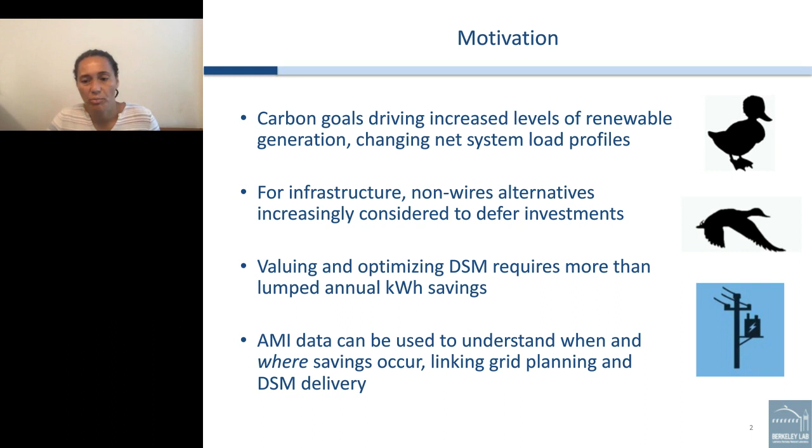In this work, I'm going to share how we've used AMI data to understand when and where on the grid savings occur, and how that helps us to link grid planning and EE program delivery.

I'm going to go through three questions. First, what are efficiency savings at different locations in the distribution grid, and how do those savings impact energy used at those locations? Second, what's the hourly savings shape at different points in the grid, and how do those shapes vary with season? And finally, what can we say about the impact of the EE programs on peak demand?

I'm going to get us grounded in some definitions and methodology before digging into results. And first, I want to talk about data aggregation and levels of analysis. Our analysis covered a scope of 51 feeders and 12 substations in the SMUD territory.

The first thing we did was we had labeled data on which meters corresponded to accounts that had participated in programs in a given year versus those that had not. So for each feeder, we aggregated the loads from the participants and from the non-participants into a single time series that's shown in green, and we paired that with outside air temperature.

To remove confounding factors, we kicked out any accounts that were known to have customer moves during the analysis period, or customer-sited PV or electric vehicles.

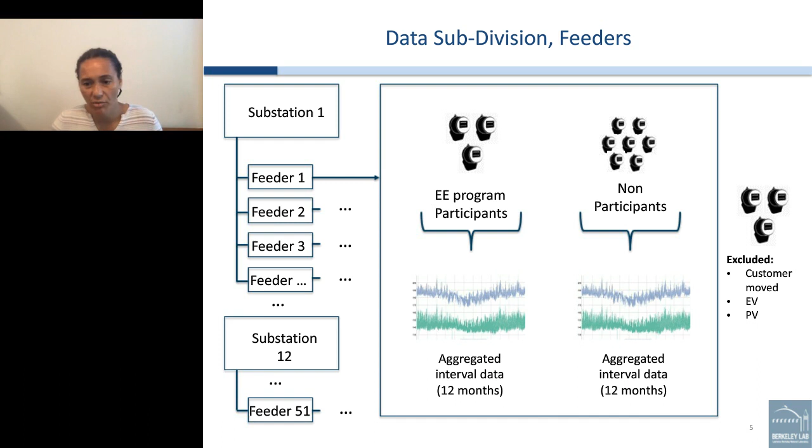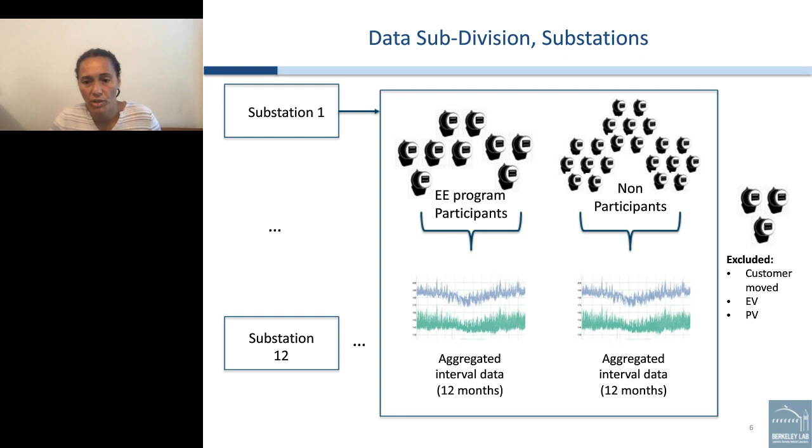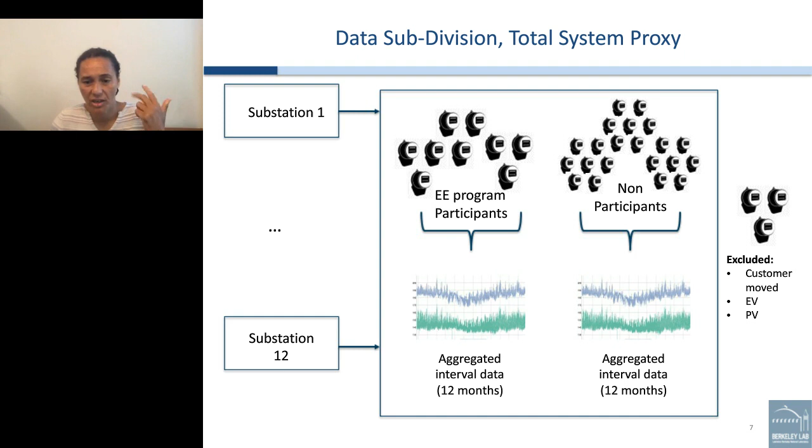First stage of analysis was at the feeder level. Then we did the same method, rolling up to all of the meter accounts associated with a given substation across each of those 12 substations. Finally, we looked at the sum total of all substations and all the meters downstream. This was of interest to SMUD as a solid proxy for the total system-wide or territory system. So we're going to talk about feeder, substation, and total system proxy levels of analysis.

As for the savings analysis, we took 2015 as a baseline year, 2018 as a reporting year for savings. In the middle, we had folks who had either participated or not participated in programs in that intervening period.

First thing we did was take those aggregated load profiles and fit a baseline model to them. We used a gradient boosting machine - I'll refer you to the paper for the details. The independent variables were time of week, time of day, day of week, season, and outside air temperature.

We forward projected the model into the 2018 analysis period, got model predictions, and the difference between the actual consumption was taken as the savings. We calculated savings at each of those grid levels: the territory proxy, substation, and feeder.

And then we broke things out temporally. We looked at an annual total savings, broke that into savings for each of 24 hours in the day, and then further broke that out hourly savings by season. In every case, we used the information around program participants and non-participants as a kind of quasi-comparison group and sanity check. So I'll be referring to that in the results I share.

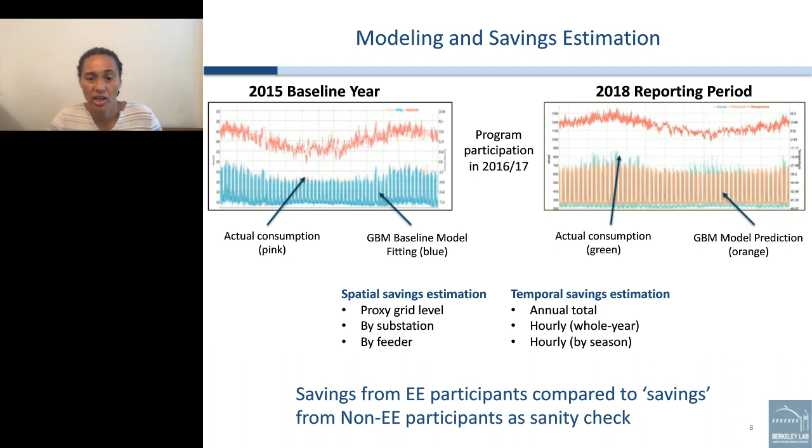As for metrics, the first that I'll talk about is a very standard, intuitive percent savings or fractional savings - that is, how much was saved relative to baseline prediction. So if you predicted 100 units and saved 10 units, that would be a 10% fractional savings.

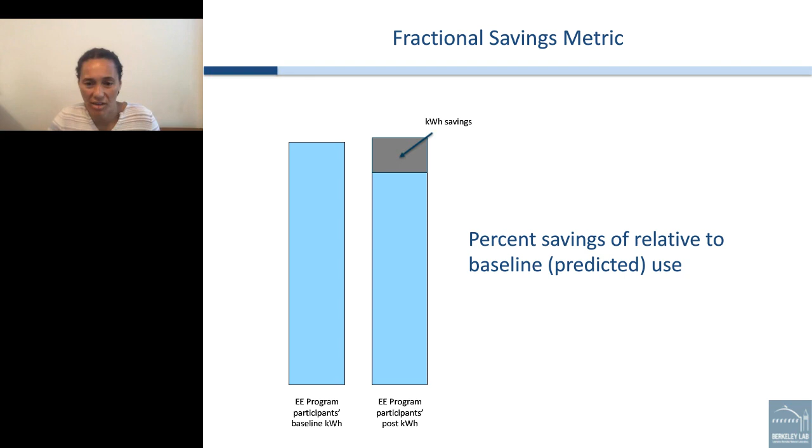When we wanted to understand the impact of savings on the energy consumed at different points in the grid infrastructure, we needed a new metric - one that considers as the denominator the total energy used at that point in the grid. Consider, for example, this blue rectangle - say that's total energy used at a substation. The vertical strip on the left might be energy used by the program participants, the remainder the non-participants.

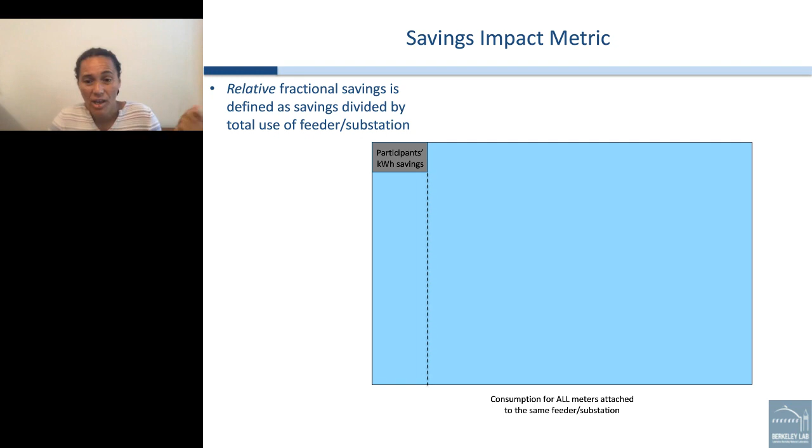We could then take the relative savings of the EE participants, divide by the total energy used at that substation, and get a fraction there, and do the same for the program non-participants. These are the two metrics that I'll focus on throughout the talk.

So I'll step into some findings. First, what are the savings at different points in the grid, and how much do they impact energy used at those points? I'll start at that sum across 12 substations, as a territory proxy kind of total level.

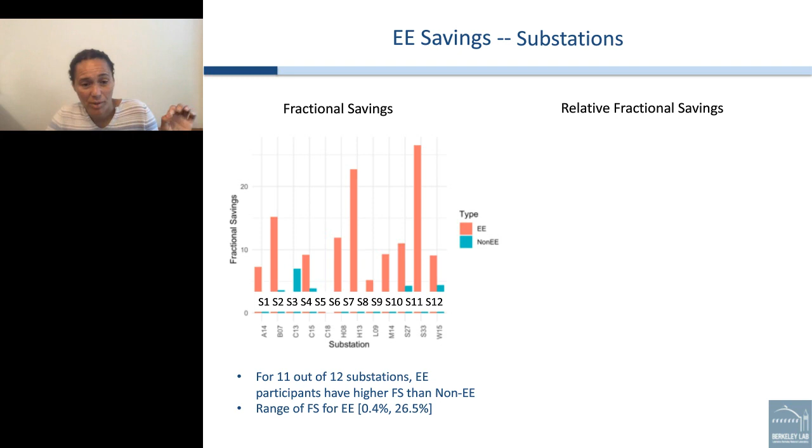So we could then take a look and do the same kind of analysis at each of 12 substations. First, I'll note that our sanity check holds - the EE group saves more than the non-EE group, meaning the pink bar is higher than the turquoise in 11 out of 12 cases. The savings achieved by the EE customers range from near zero at the substation level to in excess of 25%. Now let's look at how that manifests as an impact on energy used at the substation.

Here we see a change from the total proxy level. At this point, out of 5 of the 12 substations, the energy efficiency savings are actually outweighing the impacts of the non-EE group. We've got a range of those impacts from anywhere near zero, because we had near zero savings, all the way up to 5%. These are the substations for which those efficiency impacts are now quite visible and material.

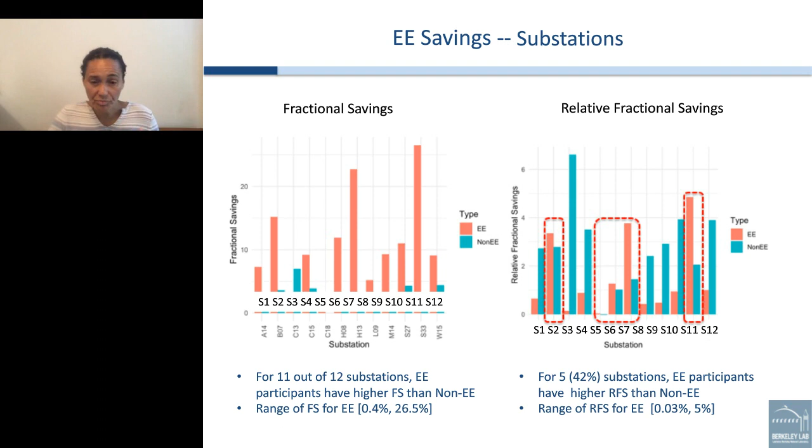I'm not going to show you 51 paired bar charts for each of the feeders in our analysis, but we'll give you a summary. First, that sanity check, EE saving more than non-EE, held up pretty consistently at 75% of those 51 feeders. I want to remind folks that this is findings from just wherever efficiency landed on the grid. There was no intentional targeting of the location of delivery nor of the measure types.

So the average impacts of the efficiency savings achieved as we move from the feeder level upstream to the total proxy ranged 1.4, 1.3%. This, interestingly and nicely, was in line with what the planning forecasts are that folks on the grid side of the house rely upon.

When we look at that total territory-wide proxy level, even though efficiency was pulling 12% savings, the impact on energy use was lost to the reductions in consumption that we observed from the non-participants, and that was just because of the small number of program participants. When we moved down to the feeder level, there was a lot more variability in savings as well as the impact of those savings.

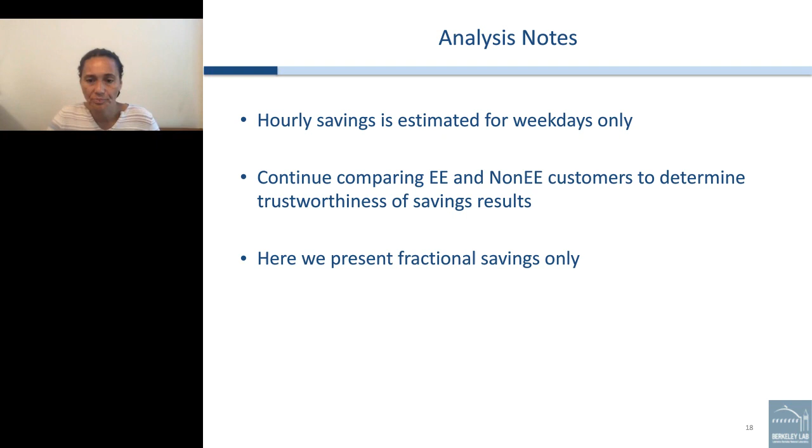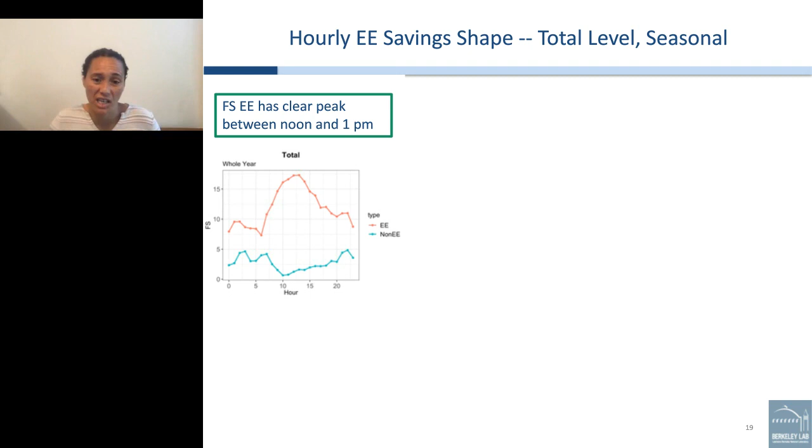First, I will show results at that total proxy level, and we'll look at how hourly savings vary seasonally. Savings are shown as a percent on the y-axis, and on the x-axis, 24 hours of the day. The red line is the EE participants, the blue line is the non-EE group. There's significant separation between those two, and that's good - that's our sanity check panning out. Savings are ranging from 10% to in excess of 15%, and there's a clear peak between around noon and 1 p.m.

Now, how about if we look now at the substation level? Again, on the far left, I'm showing that total grid proxy level, each of 24 hours, the percent savings from the EE and non-EE groups. And then we break out in the 3x4 grid each of our substations.

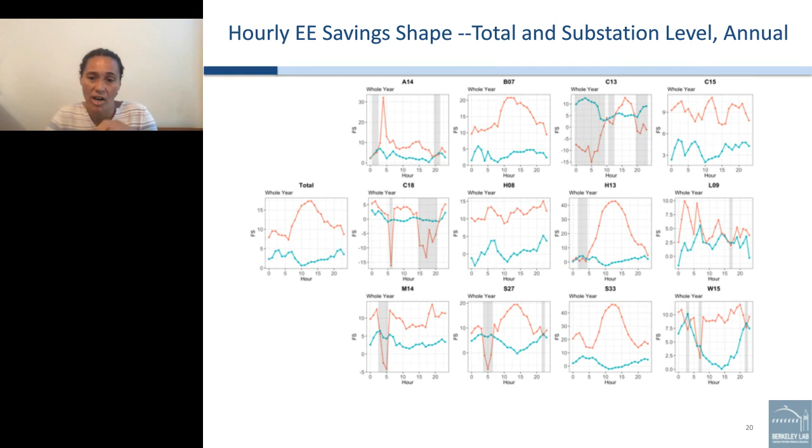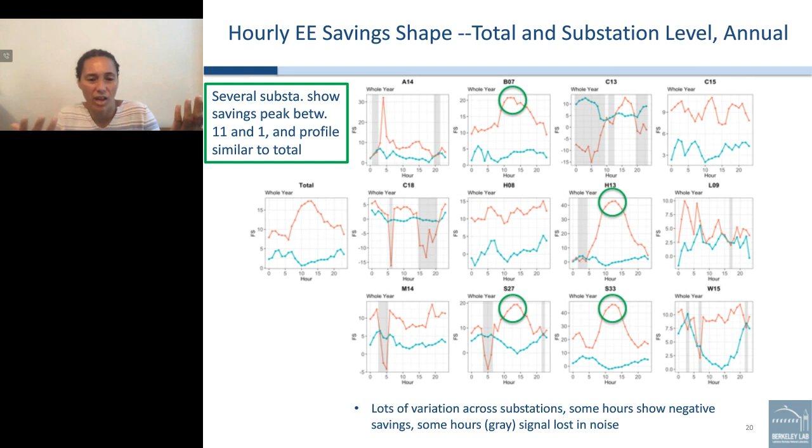Several substations, their profiles kind of match that total territory proxy level. They've got those nice curves and peaks again between around 11 and 1. But what I will note is that there's a lot more variation in these savings profiles. Some hours we're even seeing negative savings, and for those gray shaded vertical portions, we've actually lost signal to noise. That's where our EE is not clearly discernible from our non-EE, so we put less faith into those hourly calculations.

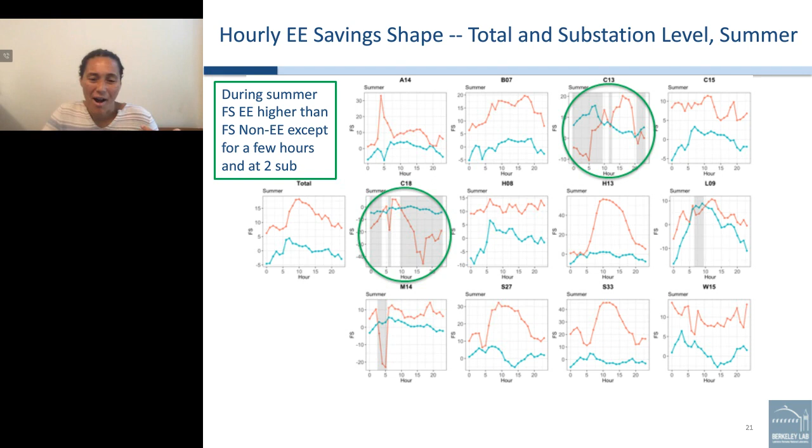How about if we look seasonally? On the left in that single plot, I'm showing the total proxy level for summer. And again, how does that play out - those hourly savings shapes for each of the 12 substations? I'll highlight that two substations stand out as a little wonky. Those were noted as being dominated by industrial or single customer loads and more anomalous in their expected behaviors. Still lots of variation, but there's very few portions of gray shading where we don't have a solid calculation of the hourly savings result.

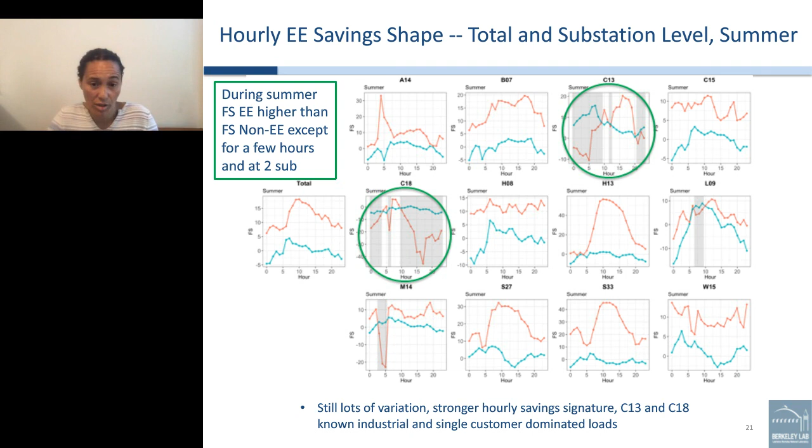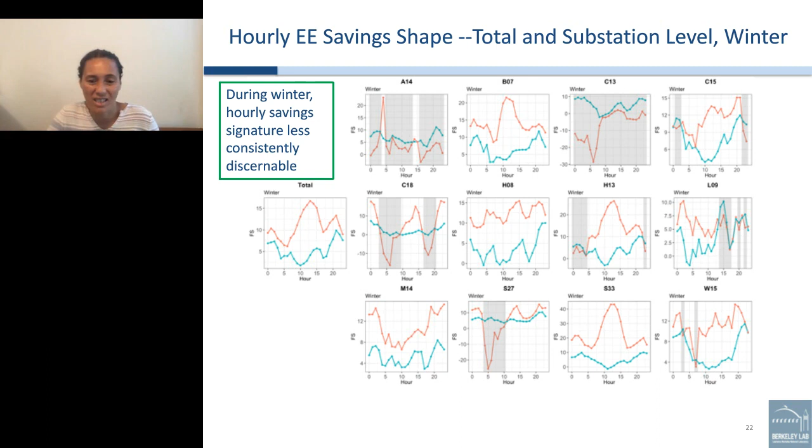The picture changes when we move into winter. You're seeing a lot more gray across those hourly savings calculations. That signature is less consistently discernible. So we put this all together and think about what's the picture as we move from the total territory proxy to substation and to feeder.

We start to see that at the total level, across all hours of the day and all seasons, we have a really strong hourly savings signal. That decays a bit at the substation level, and by the time we get to feeders, we've lost more hours of the day in which we can confidently give an hourly number. Also, across seasons, summer is where we've got the strongest savings signal.

Our last research question was: what's the impact of efficiency programs on peak demand? We took the single highest load day in our analysis period, a day in July 2018 for SMUD, and made an hourly prediction for that day. In the two plots shown, the chart on the left is EE participants, the right chart is non-participants. The solid red line is the predicted load, the solid black line is the metered load.

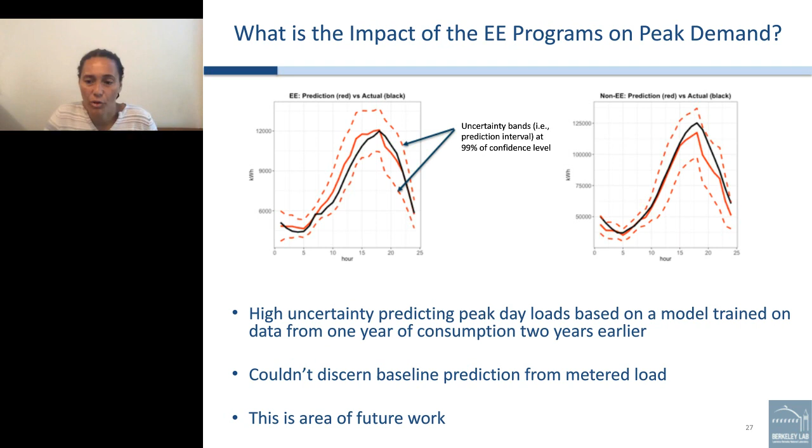The red dashed lines represent a 99% confidence interval around our prediction. The fact that both our prediction and our metered load fall within that means we couldn't statistically discern the baseline prediction from the metered load. So we have high uncertainty trying to predict peak day loads using a model trained on data from a whole year of consumption two years prior. This is certainly an area of future work for us. We didn't quite nail this question.

I want to move now into some takeaways and concluding thoughts across this body of work. First, meter-based analytics can give disaggregated savings patterns at the grid level, and give really useful insights at specific substations as well as feeders. The most fun part of this project was that it gave us common ground to connect grid planning and forecasting business units with customer solutions and program delivery. The dialogue this sparked was really fun, and using those measured values helped make efficiency real to both groups.

I'll issue a call to action: this approach can be used right now. You can track efficiency program impacts for their temporal and locational benefits. Moving forward, I'm very interested in using these kinds of analyses to intentionally target future EE and non-wires alternative efforts, and in so doing, really optimize the value of the efficiency we're delivering. We've barely scratched the surface in this work. There are many opportunities for ongoing discovery, and I welcome anyone with similar interests to contact me. We'd love to collaborate. Thank you for your attention.

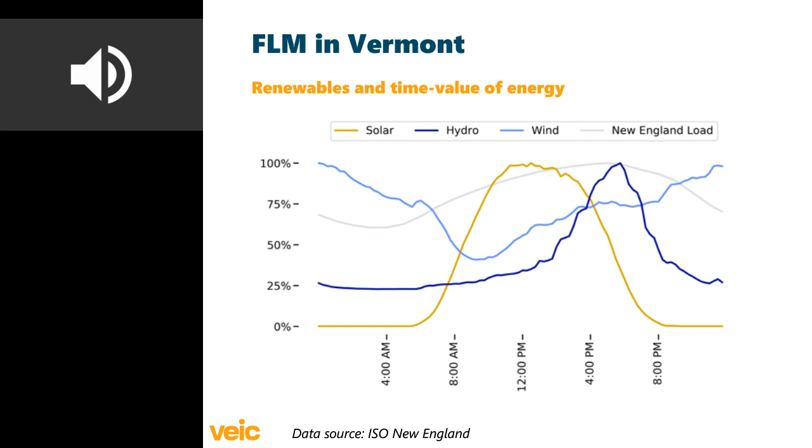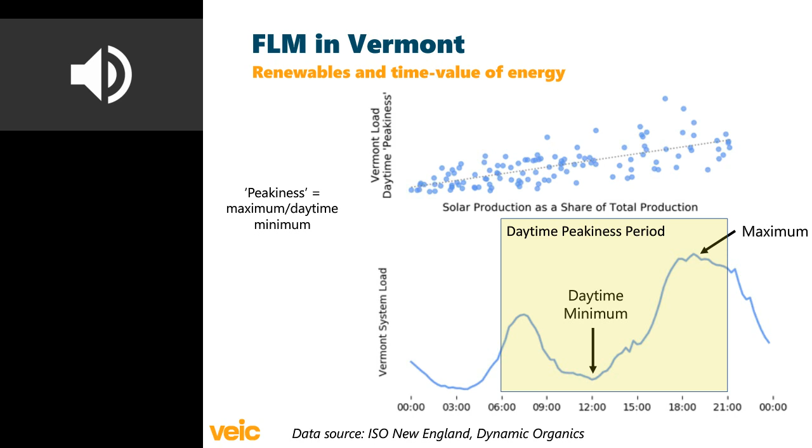These pronounced peaks have real ramifications for the grid, one being the cost of energy. In fact, there are 13 specific hours of the year tied to peak demand that drive approximately 25% of customers' energy bill costs. One of these hours is related to the forward capacity market - there's 1 hour per year tied to New England's peak consumption. The other 12 hours are tied to the regional network service fees, which is the monthly Vermont peak hour.

And so with load management, we can focus on peak demand and reduce these costs as well as carbon emissions.

Now that I've given some background on the value of load management, I'll give an overview of our pilot methods. Efficiency Vermont enrolled a variety of customers to represent the commercial and industrial loads from a wide variety of facilities. This ranged from colleges and office buildings to natural gas facilities and wastewater treatment plants.

Customers benefited from upfront and continuous engagement from energy consultants throughout the pilot. They were also engaged using a dashboard built by Dynamic Organics. This showed when peaks were likely, as well as what the real-time and forecasted load was for the grid. This kept customers engaged in the value of peak demand so they could make good decisions on how to respond to peak events and relate that to their building operations.

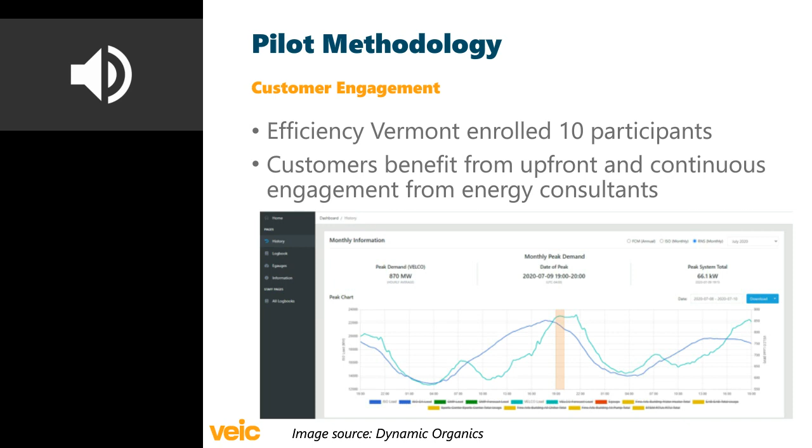Another key element of the pilot's success was to enable flexible load and control systems. Typically, HVACs and industrial process loads have been viewed as more static and not usually called upon for demand response or flexible load. But what we found was that with assistance from energy consultants, the load is actually very flexible, and behavioral change was all that was needed.

For example, an industrial site can change how they schedule their operations to avoid grid constraints without losing sight of their total operational goals.

Updated building management systems are also critical to translate the signals from the utility into actionable control sequences and building towards this interactive grid. This ensured controls were reliable, allowed for more complex logic systems, and cost-effective enrollment when a BMS is already installed.

Efficiency Vermont is developing a controls program to update building management systems throughout Vermont. This has really a two-stage benefit: first being the energy efficiency savings, and then it better sets us up to enable flexibility.

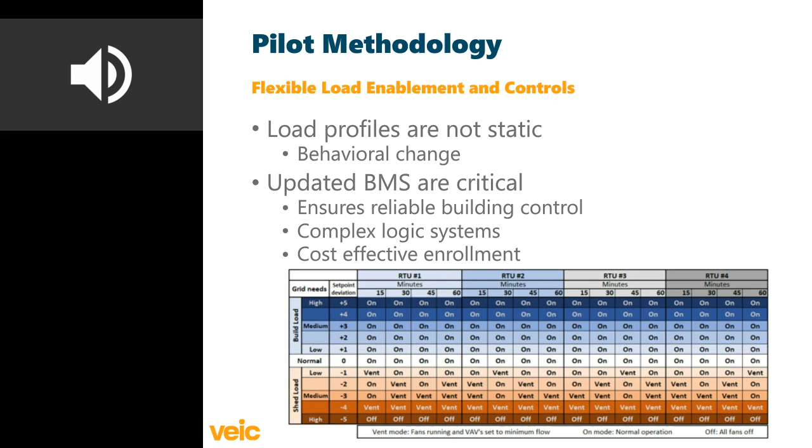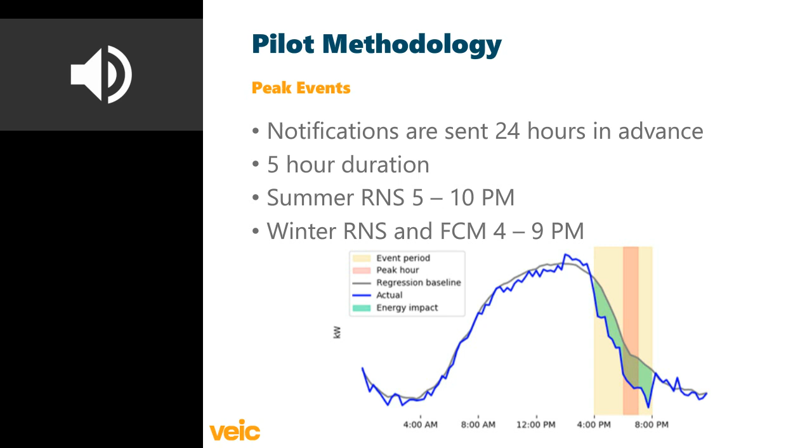And so now that the controls are set up, the utility can now start calling peak events. Notifications were sent around 24 hours in advance and were about 5 hours in duration. The time window ranged depending on the targeted peak. In the summer, the windows tended to be a little bit later than the windows for the winter or the FCM peak.

The customer incentives were really driven by the savings that occur from these fees related to the FCM and RNS. These fees change each year based on infrastructure, reliability, and administrative costs. The forecasted trend is that RNS rates will be going up over the next few years, and the FCM will go down a little bit. But our utility partner really sees this as a good monetizable value stream to get load management off the ground in Vermont.

Green Mountain Power rewards customers for 70% of their peak reduction during the peak hour. When designing this incentive structure, Green Mountain Power was really focused on how this affects participants, but also non-participants, and we needed to make sure non-participants were not adversely affected. So the remaining 30%, once this is up to scale, will then be redistributed to non-participants.

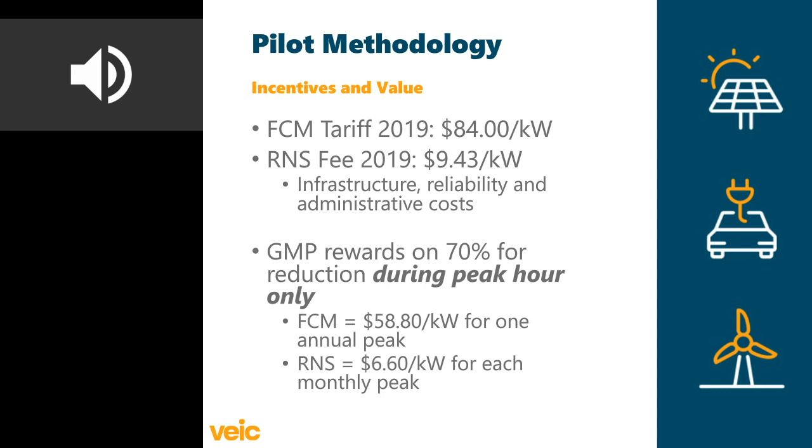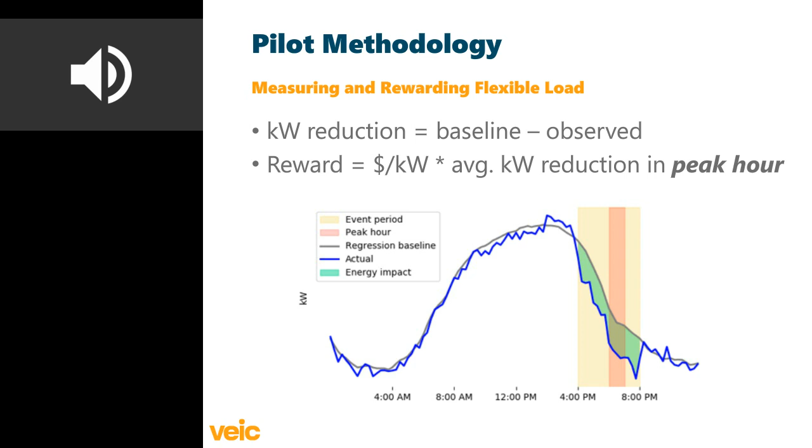To calculate the customer's monthly credit based on their performance, we look at the customer's counterfactual load, or baseline, that represents what the customer would have done in absence of this load event. We then compute the difference during this peak hour and use this to calculate their monthly credit. So the customer payment really hinges on our ability to accurately estimate what they would have done in absence of the event.

To do this, we trained an autoregressive moving average model, or time series model, on AMI data. We really tried to use AMI data and avoid installing a lot of submeters to keep this a scalable approach going forward. This model takes a linear combination of previous load as well as temperature. We did a lot of feature engineering to explain the time of week and hour of day patterns we see in the data, and we ended up using a Fourier series to model these patterns.

We saw a reduction in error of about 6% compared to a naive averaging method that doesn't take into account the correlation between the load values. I won't dive too deep here, but feel free to see our paper or ask questions if you're interested.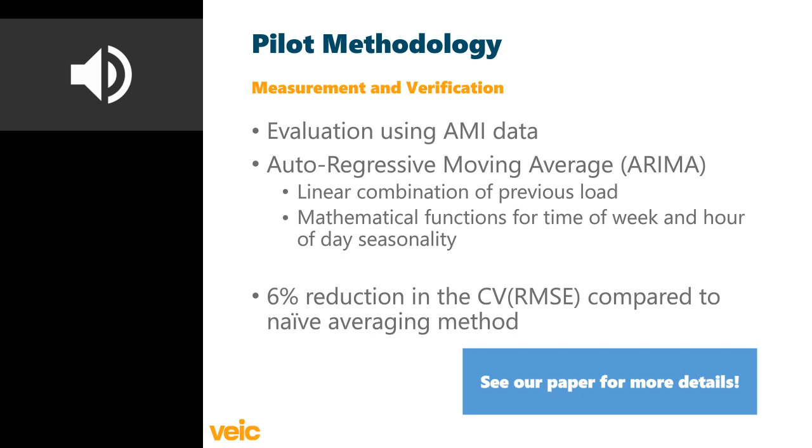Now that I've laid a groundwork for our pilot methods, there are some key results I'd like to touch on.

For the remainder of the summer, we saw that for the regional peaks, the performance was not as high for the industrial customers. They were not able to sustain reduction for the full 5-hour peak window without compromising their operational requirements.

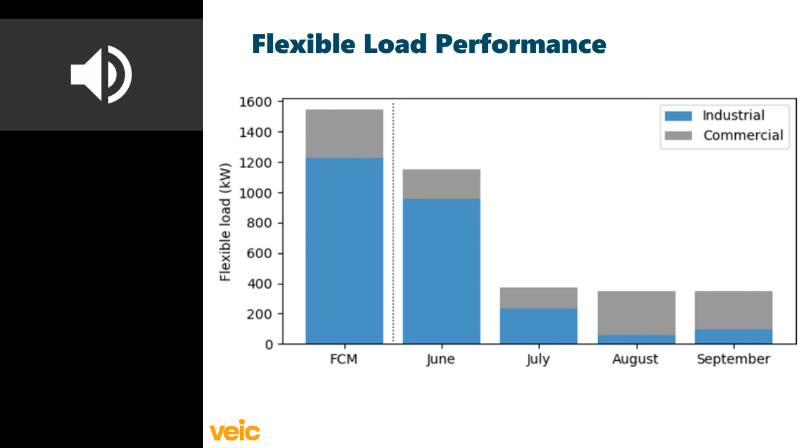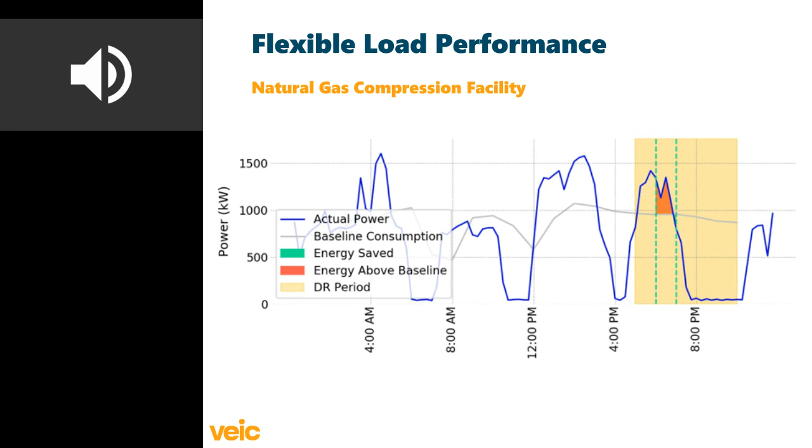Here's an example of how the cost of not operating at a natural gas facility was not offset by the reward during a regional RNS peak. The facility was not able to shut down for the full window. They shut down for the second half, and you can see relative to the baseline during the peak window, the customer's usage was actually higher. So this yields no reward for this customer for that peak.

But for most of the commercial sites and some of the industrial sites, they were able to reduce for the full event, since most of them didn't have as much impact on their operations. So as long as the utility forecasts these peaks correctly, they received payment relative to their baseline.

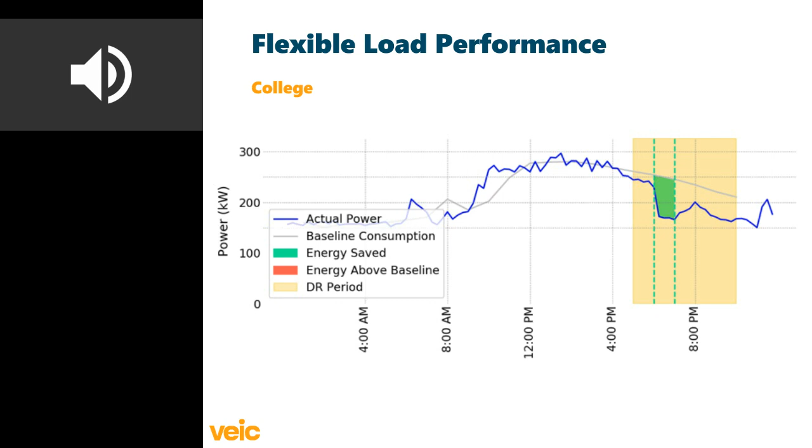Sorry about that. So one of the key learnings that the team took from this first iteration of the pilot was that with all of the utilities' demand management programs, regional peak events were often being shifted to a different day or a different hour due to the responses during these events.

So what this means is that the risk of peak forecasting is landing on the participant and not just on the utility.

Given our learnings from this first iteration, the team has developed a second iteration of the pilot, taking all of these learnings. The first thing we wanted to address was the unrewarded effort, so we do this by instead rewarding for the average performance across all event periods. This removes the risk of peak forecasting from the customer payment.

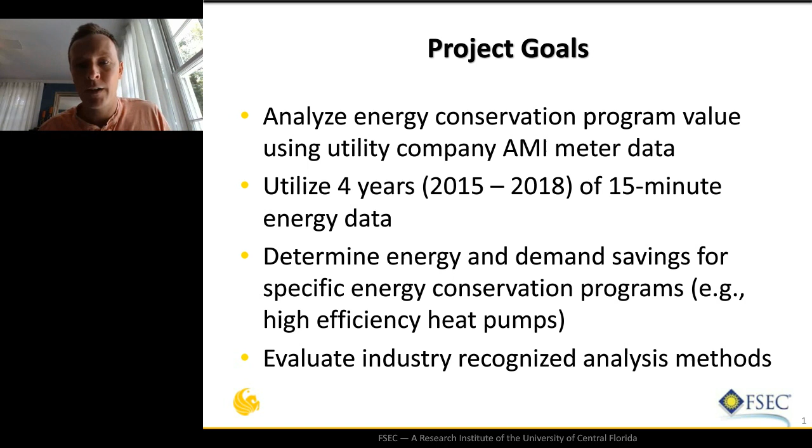It looks like we're having some communication difficulties. Can you hear me now? Yes, Richard, go ahead, we hear you. Oh, I wasn't supposed to control my own mic, that's what they told me. Okay, I'll start over.

A recent program was with a utility company in Florida that wanted to analyze their energy conservation programs. They wanted to know if each of their programs was viable, in that the rebates they were providing to the customer were a good investment, and they were getting a return based on the energy savings and peak demand reductions they expected.

At the FSEC Energy Research Center, Danny Parker, Robin Vieira, and Karen Fenaughty helped on this project.

The goals were to analyze the EC program value using the utility-provided AMI meter data. The utility company provided four years of data, from 2015 to 2018, at 15-minute energy intervals. We were to determine the energy and demand savings for a specific EC program, specifically high-efficiency heat pumps, using industry-recognized analysis methods, which progressed in their level of detail.

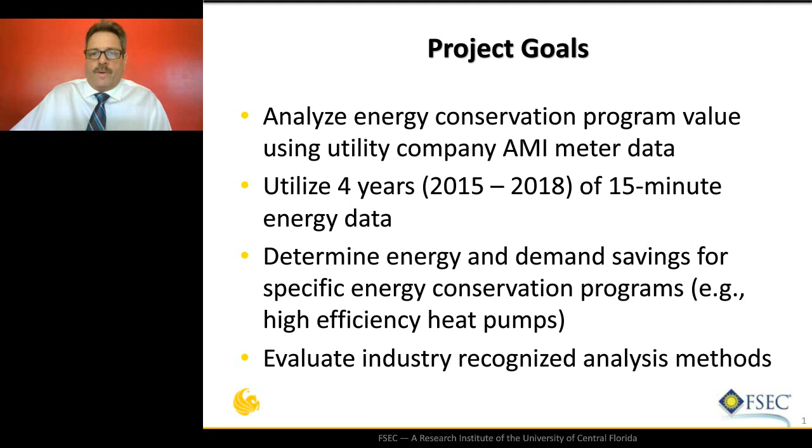First we looked at current versus future participants. The utility company provided us with a list of EC program participants. We picked out a group of AMI meter sites that were participating at the time and also a group that were future participants but had not yet installed the rebate.

We also looked at a before and after protocol, which most researchers are familiar with, where we look at the data before the retrofit is installed and then after. There's no regression to weather in this method.

We then took that before and after sample and evaluated it with a regression against outdoor weather. The first three methods were averages of the entire data set, with all sites averaged into one time series. As a fourth method, we took those before and after samples and looked at the individual meter data, regressing each one against weather.

Finally, the simulation evaluation is the method utility companies will typically use to evaluate their EC programs.

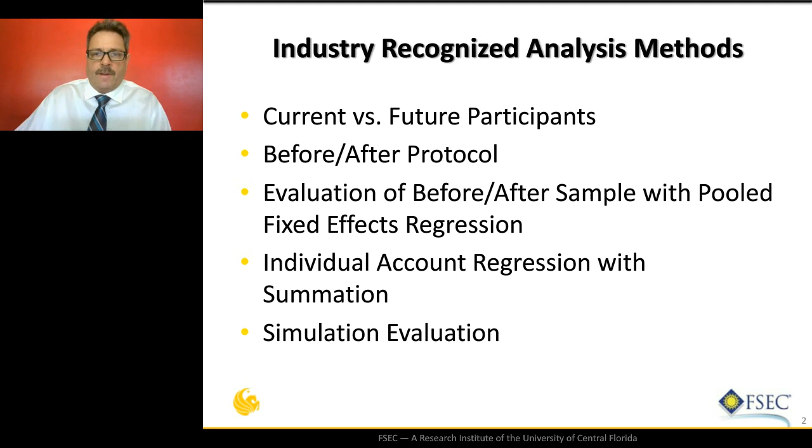For the current versus future participants method, we selected participants that had installed a high-efficiency heat pump by 2016 and called that the rebate group. From their list, we also selected participants that wanted to participate but had not yet installed the heat pump, and that was our control group. This is an unpaired sample, meaning any AMI site in the rebate group did not correspond to one in the control group, so we expected higher variance in the data samples.

This was a same-year analysis, which hopefully would minimize the difference due to weather and changes in participant energy consumption over time. When looking at time series data, it's possible people could add more plug loads, change their habits, or occupancy can change. Looking at the same year would hopefully minimize that impact.

The before and after protocol compared the control group I just spoke about in 2016 with the consumption in 2018, from January through August of each year. The same homes were used pre and post, so this was a paired sample.

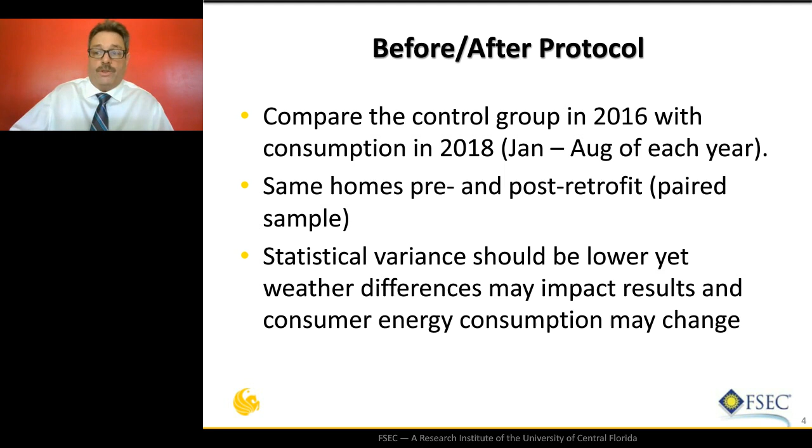For each home in the control group, there was a corresponding home in the rebate group. The statistical variance here should be lower, yet there were still going to be weather differences that may impact results since you're looking at a long period of time. Also, consumer energy consumption may change.

This is the average of all the sites in each group, not individual sites. So we regressed each of these groups to provide cooling energy use and heating energy use.

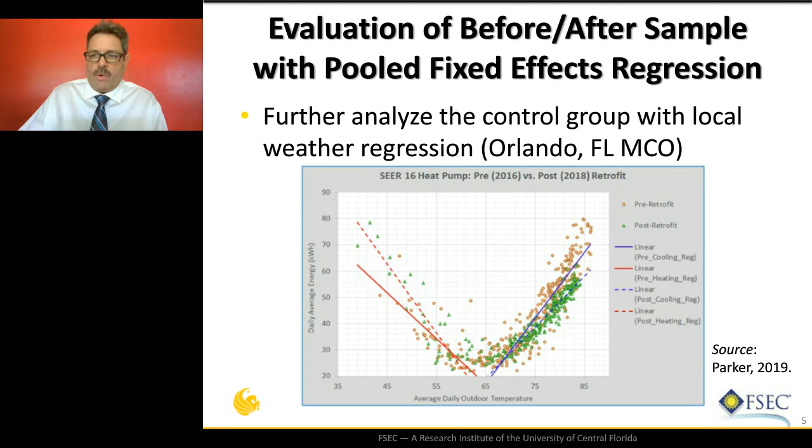We used Orlando weather data at the international airport to regress against all the sites in the region we were interested in, which was very near or in Orlando. Finally, we did an individual account regression with summation. So we took that group of sites we had analyzed as a whole on average, and we analyzed each individual site against weather.

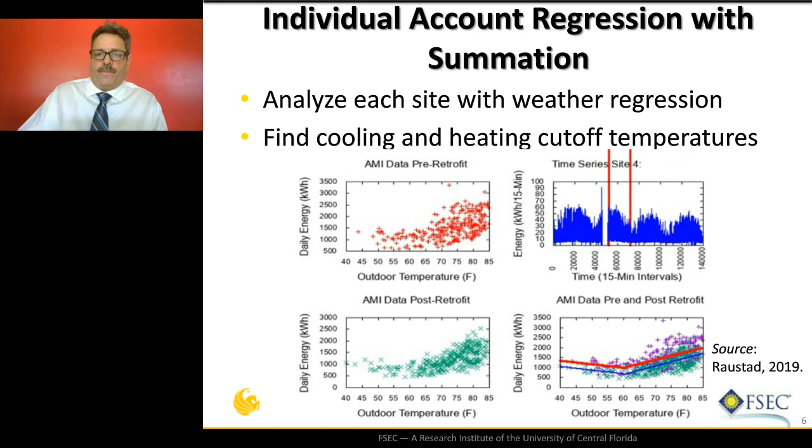To look at the individual account regression gives you a little bit more information, because since you've regressed cooling and heating energy per site, you can start to get information on heating energy and cooling energy separately. Then when you sum up the energy over the year, you have the annual energy, and you get an idea of what the baseline energy use is without HVAC.

Here in Florida, in the off-season, my electric bill is about $90. If I take off a $10 customer charge, that's about $80 I'm paying for energy. At 12 cents a kilowatt hour, that's about 8,000 kilowatt hours. So these numbers actually do start to line up with real information.

You have a lot of information here you can begin to look at. Our heating season is rather short, which is why the heating numbers are small, and we have a fairly intensive cooling season here. So you can see the cooling season can be about 40%, which people understand as far as HVAC energy use goes. So we'll sum this information up to get the annual energy use.

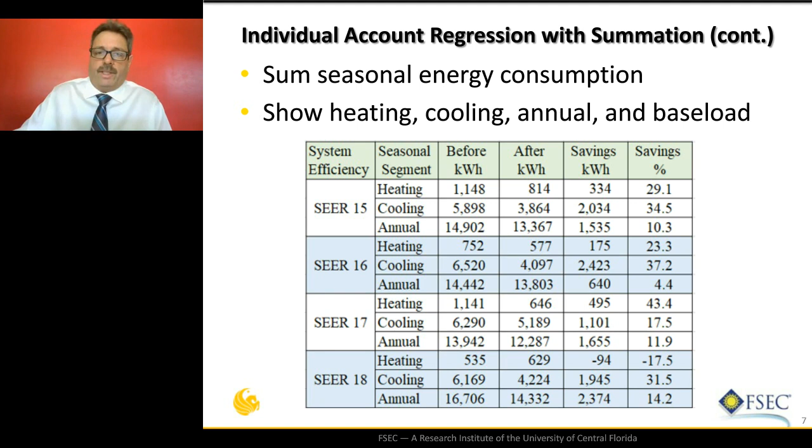In the simulations, we selected the SEER, and the simulation itself sized the unit based on the building for that input deck. This is the historic method used by the utility companies, and the utility company really asked us to give them the savings of the SEER 15 and up heat pumps with respect to SEER 14 units, which was easy to do in the simulation.

When we looked at the AMI data, we didn't have any idea of what the previous unit was, so we weren't able to get them referenced to the 14 SEER. In fact, there were no homes that had installed a 14 SEER as part of a rebate program because that was the code compliant SEER level at the time.

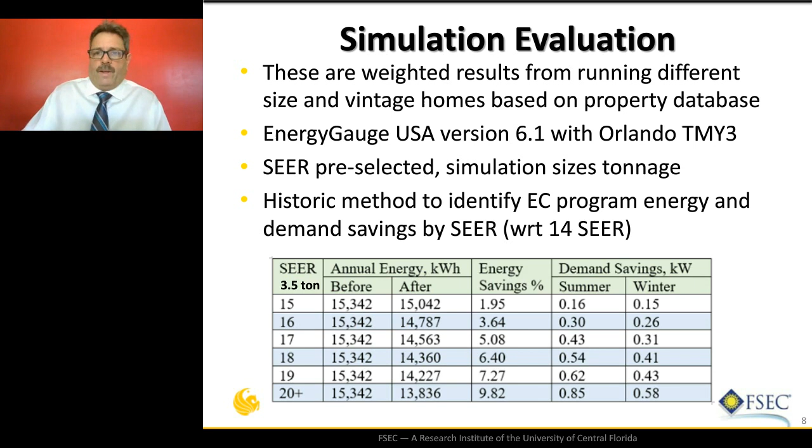We don't see really more savings as the SEER increases. You have to remember here that we were comparing a non-paired sample of the rebate participants and those participants that had not yet installed a system. So we didn't have a real good feel for what differences there were in the buildings or even differences in the systems they had installed at the time.

As we went to the before and after sample, we start getting better savings numbers, yet there still isn't a good trend towards higher SEER saving more energy.

The before and after with regression now starts to show a trend of increasing savings by SEER, and the individual account regression also shows that same increasing savings as SEER increases.

And to compare to the simulation, where we see a few percent savings over and above SEER 14, and that few percent increases as the SEER increases as well, you can start seeing that there's a trend towards increasing savings from the AMI data when you're looking at the last two methods, and both of those regress against weather.

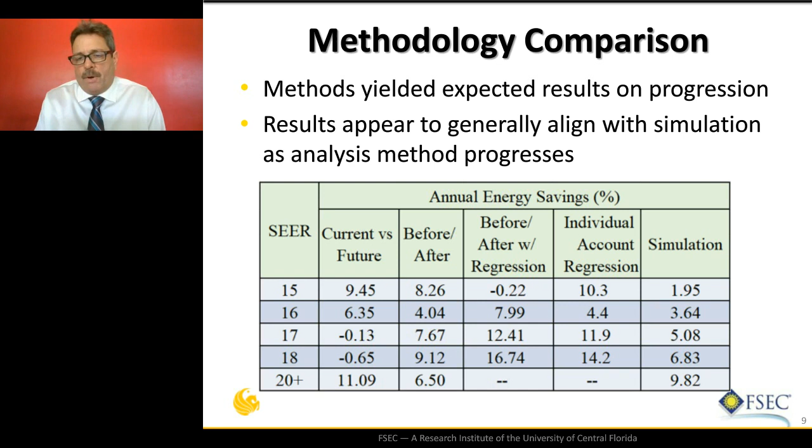As we went to the before and after sample, there were even fewer yet, because we were restricted to the control group, or the rebate group, to deal with. And then when we started adding the regression in, those samples even dropped a little further because we started realizing that some of the homes didn't match well with weather, and we dropped them out of the comparison.

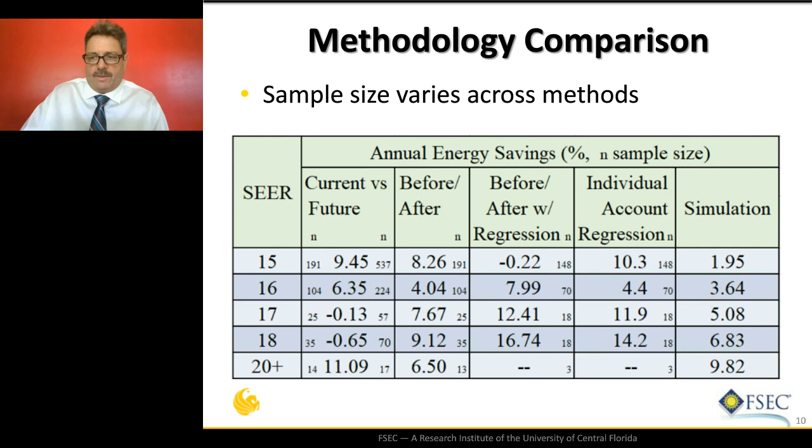And when we moved towards the before and after, we started to now see a trend, because this was a paired sample and the variance in the differences were smaller. We can start seeing a trend in savings versus increasing SEER.

And then when we add the regression to weather to that, it even becomes more pronounced and in the right direction. And then when we look at the individual regressions, we see that the trend now, in this case I'm comparing to a SEER 15 because we didn't have 14 data, and the increasing savings versus SEER trend has the same slope as the simulation results.

So as we progressed from these methods, adding more and more complexity and regressing against weather and then looking at the individual accounts, we started to get a better result. And we're getting general agreement between what the simulation showed.

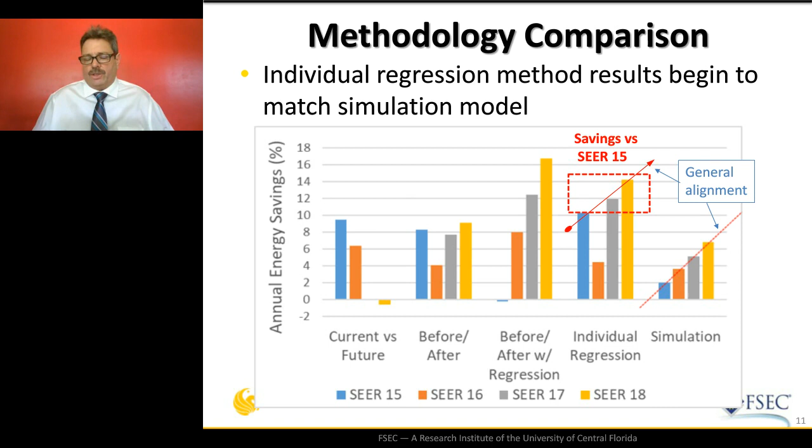Some of the things the utility should consider, and what we found during this project, is that the AMI data collection policy should actually be reviewed, looking at the frequency and storage requirements for all that data and the quality of data.

In this project, the frequency was 15-minute data. For the energy data, we looked at daily energy consumption, and for peak demand, we looked at the peak hour, which meant we needed a better resolution, at least hourly data. Thankfully, we had 15-minute energy data.

The energy conservation programs should keep more detailed records of the building characteristics and equipment types, whether it's a 10 or 14 SEER unit that was replaced, because that information can be useful during the analysis.

The results here reflect total building energy use savings instead of the actual EC program savings. Although the savings for the energy conservation program was our target, and we did the best we could to give the utility company that information, it's still the total building energy use we were looking at, and any changes in occupancy behavior or building performance, plug loads, scheduling, and things like that are going to be reflected in the results.

The final thing we did, once we knew all this information on these different methods, we took that manual analysis we did using Stata for the statistics and spreadsheets for the final results, and put all that information into a program where we could take the utility data, run it through the program, and spit out the final results, which took us 6 months for this initial heat pump energy conservation program.

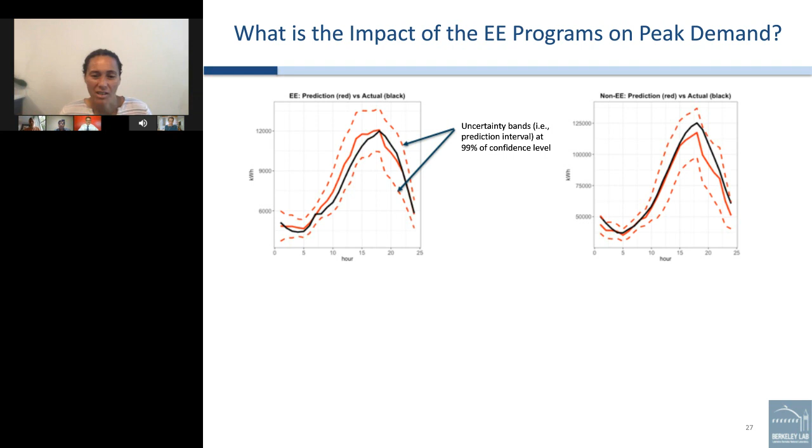The first thing I'll say is I absolutely appreciate that we don't necessarily need 99% confidence on our efficiency findings. We aren't medical trials, we don't need that. What I will note, however, is that even if you started shrinking those dashed lines, there's not a heck of a lot of space between the solid red and the solid black.

And so it'd still be really difficult to discern statistically those lines from one another. For the non-program participants, the lines are right on top of each other for most of the day. So thank you all for those questions. I could go back and ask my partners and team members to create these plots with different uncertainty bands, but I don't think the conclusion would materially change. This is definitely an area of future work for us, to make these predictions with more confidence.

I got some other interesting questions that I'd like to take offline through direct engagement with folks, around what can we do next and how can we apply these types of findings in the field for settlement, et cetera. So I'll stop there and pass on to my co-presenters.

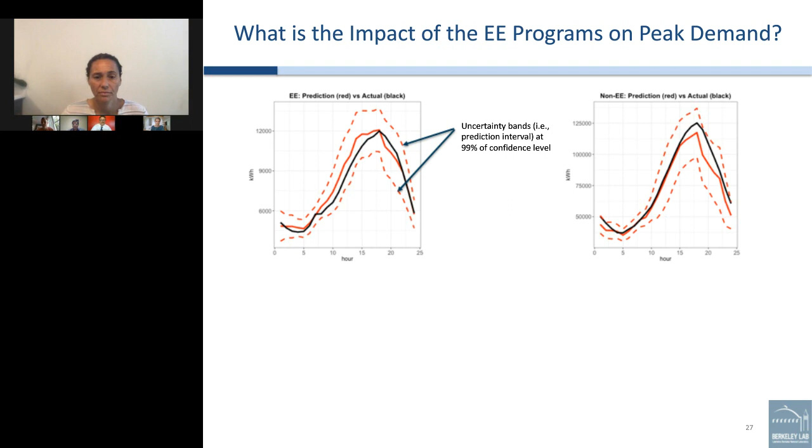Thank you, Jessica. Abigail, a question for you. There was a question about the industrial facilities that were able to respond automatically - what kind of software and hardware solutions did they have? Did they already have them in place? I think ultimately what we're trying to get to is how scalable is that solution - how many of the customers already have that, doesn't take much to integrate, and how many customers in Vermont would have a maybe not small upfront cost to get that set up?

Yeah, so for right now, the pilots or the customers we're working with, only a couple of them have up-to-date building management systems. But going forward, Efficiency Vermont is really investing in building management systems across the state. Once that system is up to date, our partner Dynamic Organics has been developing a software solution to connect the building management system to the utility. Once that software is fully developed, the connection to the BMS is relatively cost effective - the big lift is installing the BMS and updating that throughout the state.